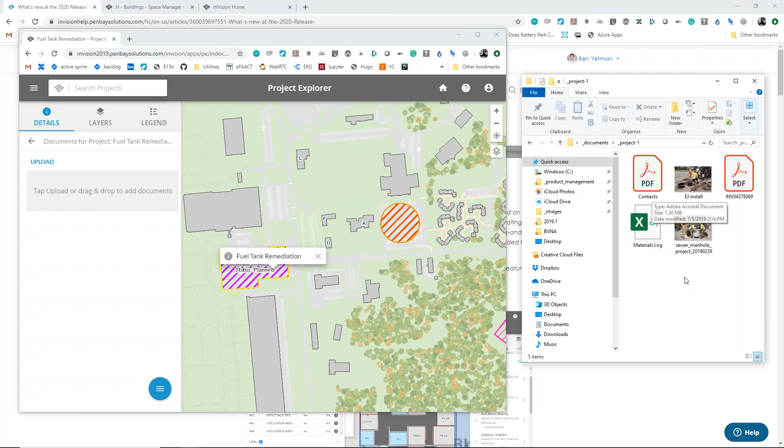One of those is drag and drop. So if we get back from the field and we've just finished a project, or in the middle of a project, we've taken some photos, we've got a material log, we've got a couple PDFs that are part of this project. If we went into InVision in the past and said, okay, I want to just add these documents to our document management capability, you'd have to click through one by one, browse for the file, find the file, upload it, and then you'd see it show up. We've really focused more now on, instead of having to do 27 clicks to get there, what if I could just grab all those documents I want, drag them and drop them, and see those upload right away.

So whether it's a space, a building, a project, an asset, drag and drop for adding content or managing documents in all the apps is one of those productivity enhancements.

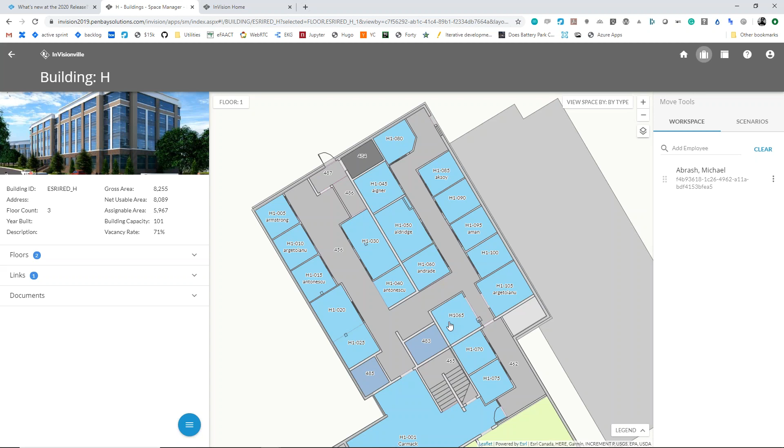Another place where drag and drop comes into play is if we jump into a building. Here in building H, I can see that we have a couple spaces assigned. I can see the label of the person who's actually assigned there, and in our move workspace, I want to assign Michael Abrash to the space here. In the past, you would have had to have gone in, click this space, look for assigned employees, another click here, another click there, find a search, and once you finally find the person, another final click to save. That comes out to about 8 clicks.

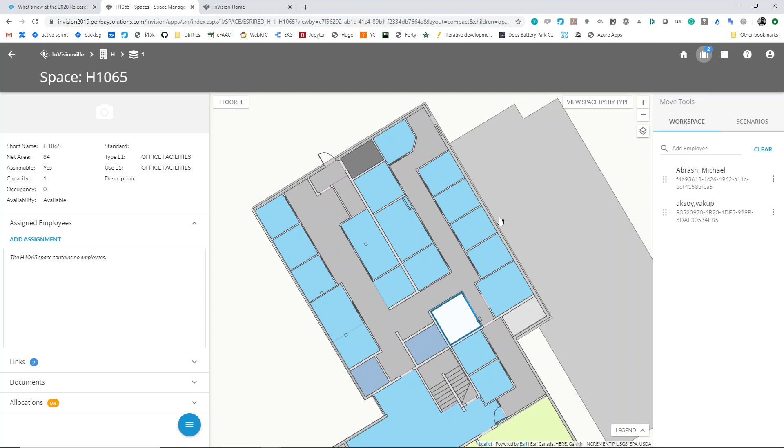Takes way too long. So now you can actually just drag and drop people into the space and go through the same exact workflow. Or if I decide I don't want to drag that person, I want to actually move Aldridge to the space next to him, I can do that. Or if I want to actually move this person out of that space, and I don't want to put them on this floor, I need to find another floor. We'll go up to the second floor. I can jump up to the second floor, find a vacant space, and add the person there. So the ability to do very quick drag and drop for simple assignments is another one of those big productivity enhancements.

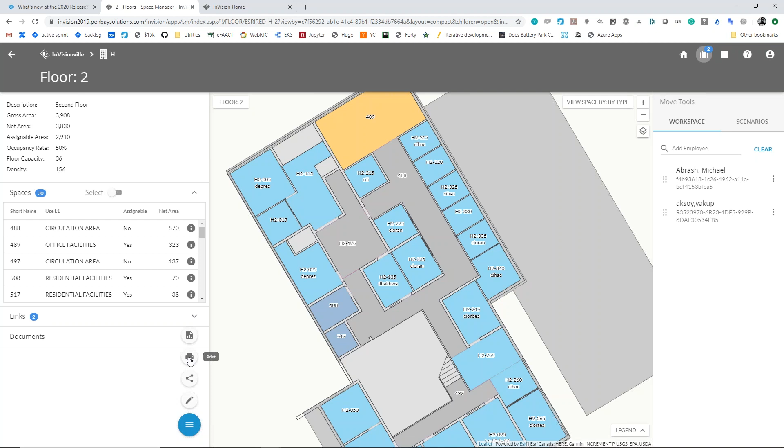One other place I know we've all spent time twiddling our thumbs waiting is in somebody's favorite feature, printing. So let's say we've got our view by switched to organizations assigned, or maybe let's do it back to availability, and we want to actually share this with somebody. So we want to create a PDF print of this floor. We could, if we wanted to, go through good old-fashioned printing, except I disabled it for today, surprise.

But instead of having to go through the print dialog, give it a title, give it a subtitle, choose a layout, click print, and then wait for the print to generate and then download, we've actually been adding more and more to our automated block plans. What automated block plans do is behind the scenes actually generate a high quality layout. They will rotate and scale the floor to that layout. And based on how many you want to create, you can have different themes of your downloadable PDF block plans.

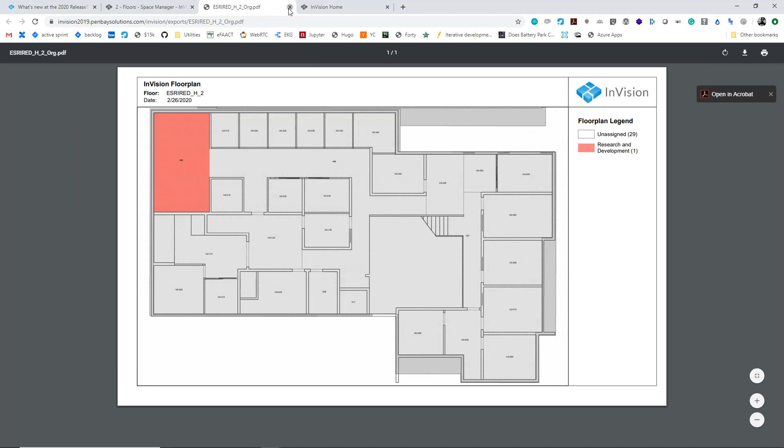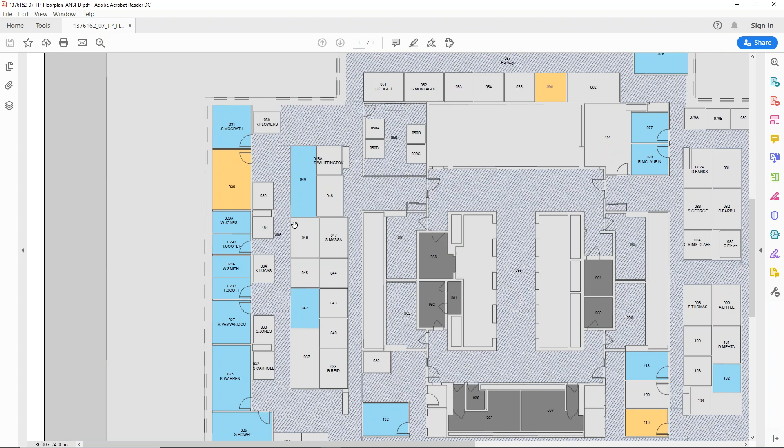So you know the data is up to date, and you can create as many of these as you want. What's really cool is you can customize or configure what is included in the layout. I have an example here with the names of space assignees in addition to the space number. We've seen others where people add square footage, so you can get pretty creative with the number of automated block plans you configure and make available to your end users.

So those are a handful of the productivity enhancements. We've also done a lot on the modernization front to make the apps even smaller and faster to load, especially on the Explorer side. You'll notice some of those as you start using the apps.

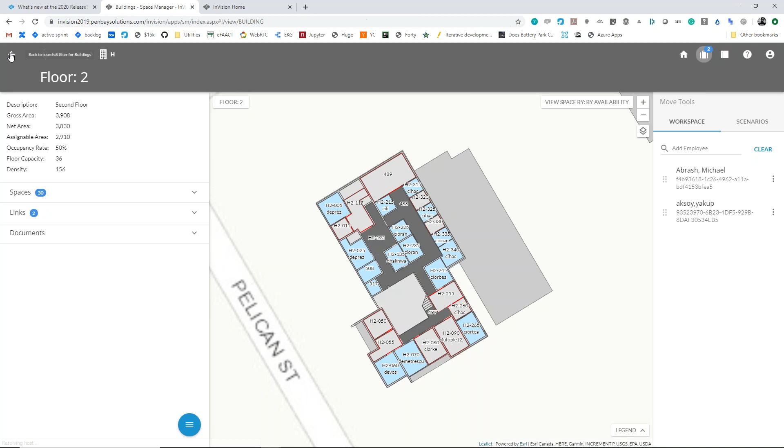One of the big ticket items we'll move into next is Move Scenarios, a new addition to the Move Tools capability. Over here we have our Move Tools work palette and our Move Workspace, which we've had for the past release or so. This is a place where, if you're working on day-to-day work, you're trying to find a spot to assign a handful of employees, and you just need a parking lot to hold them while you search for space.

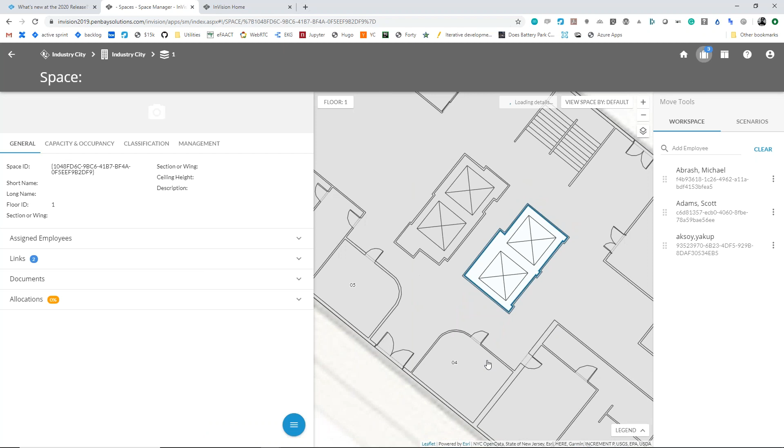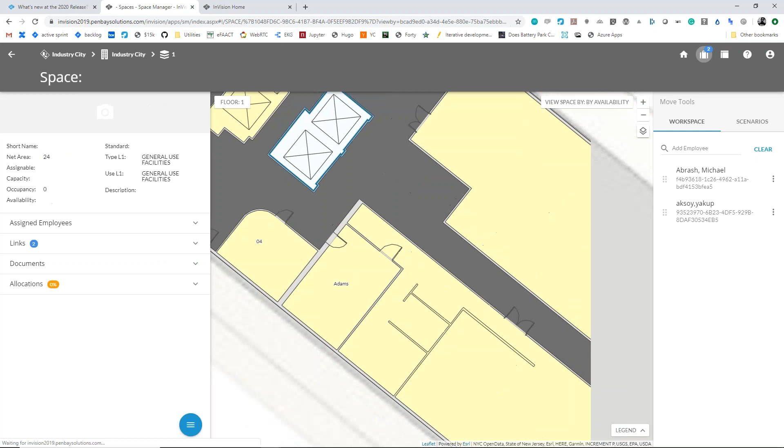This uses the same drag and drop interaction. I can add somebody here, then search for an appropriate space or floor to perform an assignment. When I get there, I can still use all my view-bys to figure out where I might have availability, and do a simple drag and drop to perform that assignment. That's a way to work through a backlog of people you want to assign right now, things that will actually be part of your production.

But we also know there are always what-if scenarios that organizations need to better understand and work through. So the new capability around Move Scenarios can be used to ask really complicated what-if questions for a bunch of different types of potential moves.

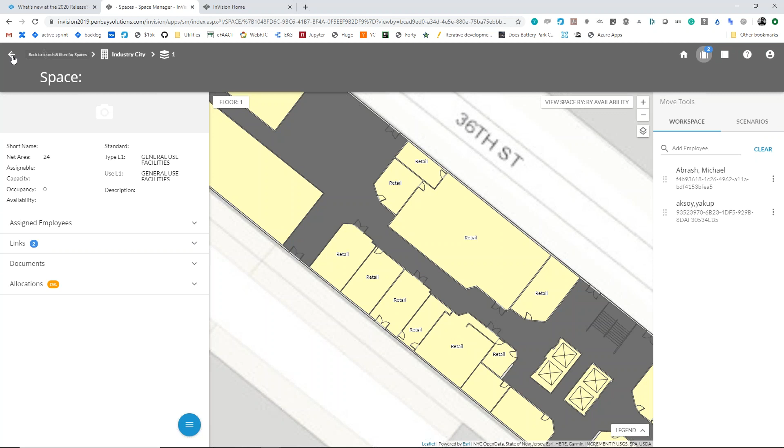If we open up Move Scenarios, I can see we have 3 different types of scenarios I've created. One, very common, is we just want to look at a test fit—could be a single floor or an entire building, sort of a restack—to see if moving people working on the same project closer together on the same floor helps us shuffle people around to optimize productivity and minimize disruption for moves.

We could have another scenario where a new building is coming online, and for the first time we have people moving in. So we have to figure out where all those people will go, even if the building isn't done yet. We might also have a common occurrence where part of a floor or an entire floor needs to be renovated, so we've got to figure out where to move all the people for the next 6 months, and then remember where we moved them so we can move them back once we're done.

So all of these are very common needs to ask and evaluate different types of scenarios. If I go into a scenario here, we've got a very simple test fit for building W. We can see this is currently in draft status, meaning we're still evaluating where to move people and still in the process of doing our work.

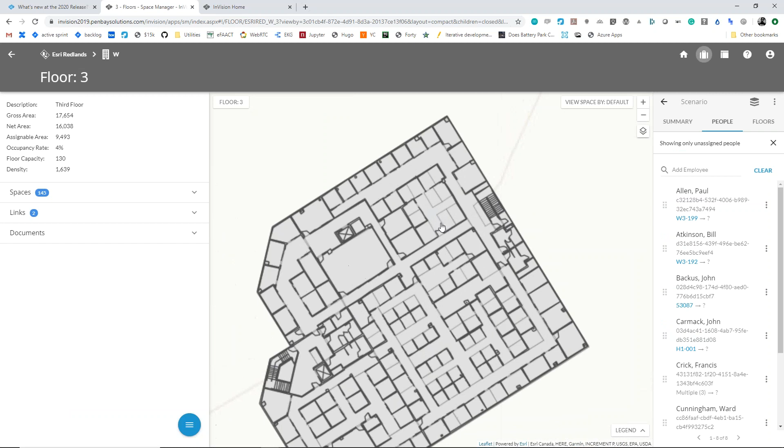We'll turn on a view by so we can understand the types of space we're moving people into. You can see some of my previous work here. There were people assigned to this space, and if you see a strike through, that means I've unassigned them from that space.

You'll see Crowther here has been assigned temporarily as part of this scenario. It might be that I want to remove Allman from that space. I'm going to put Allen back in that space, and I can see the map update to let me know where I'm at and what I'm doing.

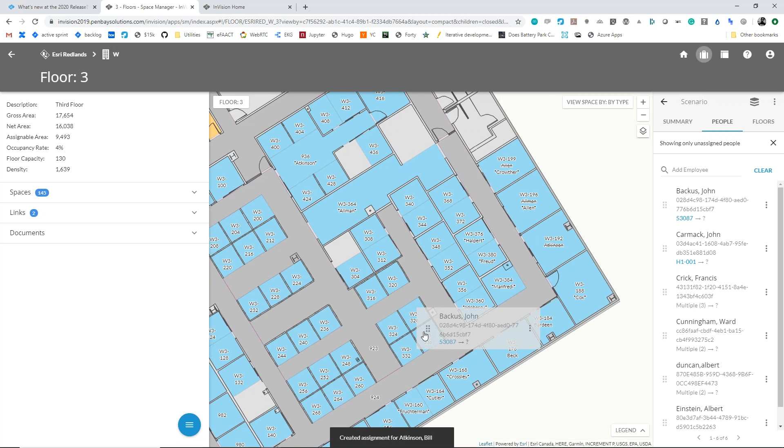As I go through and do these assignments, these are not actual production assignments, these are just a scenario. So nothing I'm doing here is going to actually affect any production data. I am free to do whatever I want, make as many mistakes as I want, back up and try again, and do everything we need to get it just right.

You'll notice on the right, as I'm moving people in, we're going pretty quickly here. I'm able to just run through, do these drag and drop assignments, and get through my list. One other thing you'll notice is it'll ask me, hey, do you want to remove people from multiple spaces or just move them from one space?

So when we get through our initial assignments, see we're done. One of the other things we can start to do then is say, okay, we've got everybody assigned as part of this scenario. I can see some of these people had multiple space assignments before, and now we have one proposed new assignment.

So we can go in and get very granular about which of the spaces we want to remove them from, and whether there are certain spaces we might actually want to preserve for them. If we have an employee that works on multiple campuses, or people that perform different roles in different parts of campus or different buildings, it might be valid for them to have 2 different office assignments. Maybe we want to remove them from these 2, but we'll leave space 698 as well.

So Francis now has this existing space and this new space here. As you go through, you can get very granular about how you handle a multi-assignment policy, because we know in the real world that's almost always the norm, and there are always going to be special circumstances where you need to accommodate those kinds of folks.

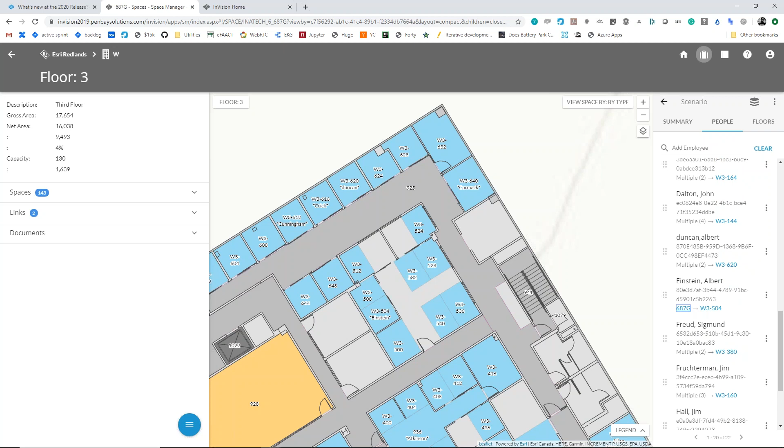You'll also see that anytime you have a question of, wait, where did we find Albert Einstein again, where did we move him from, you can really easily click the origin space to see where we're moving Albert from. You can always click the destination to figure out where that person's going. So it's really easy to reference the from and the to as part of a move scenario.

It may be that we wanted to add additional floors. If we were doing a building restack, we could have added multiple floors here. I have one because it's more of a floor level shuffle. But we've gotten to a point now where we've gotten through all of our people assigned in this test fit, so all 22 have draft assignments.

And we kind of want to evaluate: how well did we do here? Does this meet our objectives? Did we make any errors? To do that, we can go to this next step, which is finalize. This will actually run all of the analysis on that scenario, and give us any errors or warnings that pop up. If you notice, we didn't have a single error or warning there, which means everything we did was perfect, which I find hard to believe, but hey, I guess we got lucky.

So if we were to go in and remove this person out, we'd make a space that's over-allocated, or even if we have people that don't have an assignment now - so I've got one person - as I start going through and finalize, I'll get warnings.

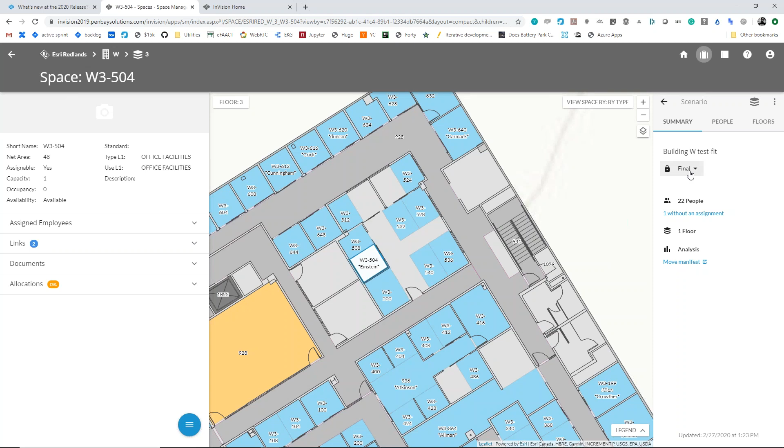So let's say we wanted to ignore this and finalize. We now go into final status, and it might be now, it might be previous, or really any time in between that we want to remember all the changes that we made. Sure, I can see them on the map, but it's kind of hard to look at all those names and numbers, so you also have a move manifest.

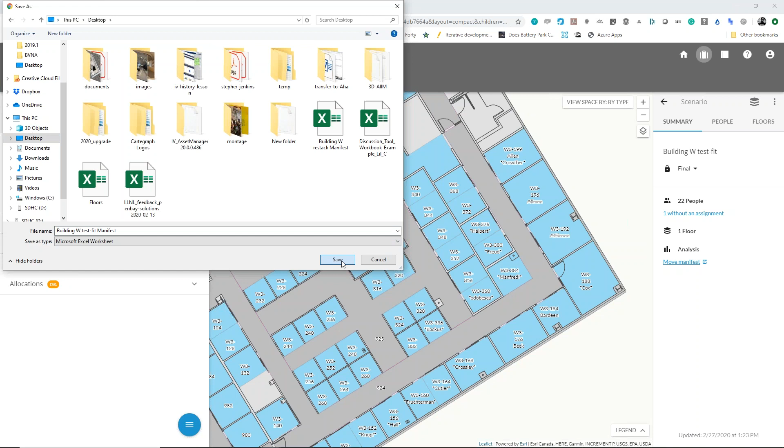And the move manifest is what you can share with people at any point to help them understand all the changes in your scenario. So if we open this up, this is very simple—everybody can use it because it's just Excel. And it shows you all the people that you've added to a scenario, the unassignments that you made as part of your scenario, and where you're proposing to move them.

So what space, building, floor. You can see there are quite a few here where we've unassigned them from multiple spaces and consolidated them down into another space. In some cases you've removed them from like three spaces and consolidated to one.

So this move manifest can be used to share with other planners. It can be used once you're actually ready to execute—actually sharing this with the operations folks that are going to help move boxes and transfer IT equipment. And it can also be used as a historical record.

So if we did go through and decide we were going to apply this move, we could apply this. And again, we'll say, yep, we'll ignore—sorry, Paul Allen, you don't get a space. These assignments are now in production.

And if we wanted to, we could go back and look at that move manifest anytime in the future to remember what we actually did for that move. So if we go back and look at applied, we can see, yep, there's our test fit, and we can remember exactly what happened, who moved where, and take a little trip down memory lane.

So move scenarios allow you to very quickly create a new scenario. You can move it through different phases. If we wanted to add a new one here, there's very little overhead in creating one, because these are meant to be pretty much zero impact and the ability to ask all kinds of what-if questions.

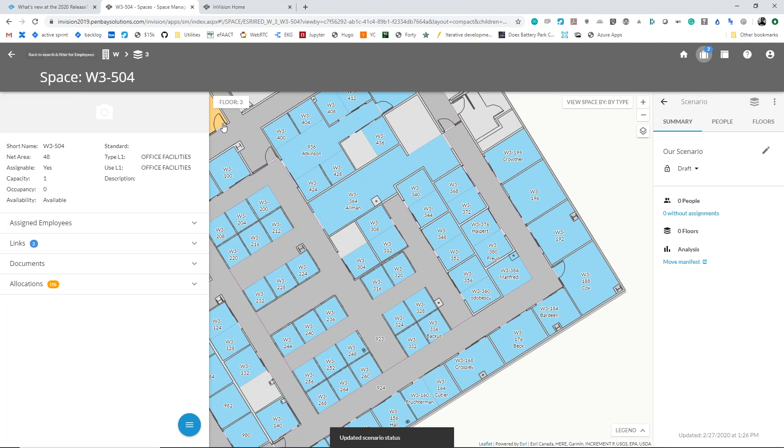So we'll do our scenario. It may be that after we get into our scenario, we decide this scenario didn't quite work and we want to abandon it because we don't really want to pursue it anymore. That won't show up in your draft list, but if we ever do want to go back and dust that off, we could look at which of those we put on the back burner, and easily take it back to draft status and start adding people and floors like we would. So if we wanted to dust this one off, we could easily start adding a floor, add a bunch of people, and jump right back into where we were.

So you'll see a lot of drag and drop interaction here for people, for floors, for actually doing your test fit assignments, unassignments, and moves. And we have made some deliberate design choices here based on how and where you're doing your work. You're looking at me doing my work on a laptop right now, with a mouse and a comfy office, and buttons I can click, but we know that's not where everybody does their work. Oftentimes you're in the field, on a tablet, looking at spaces as you're trying to walk through and plan things out.

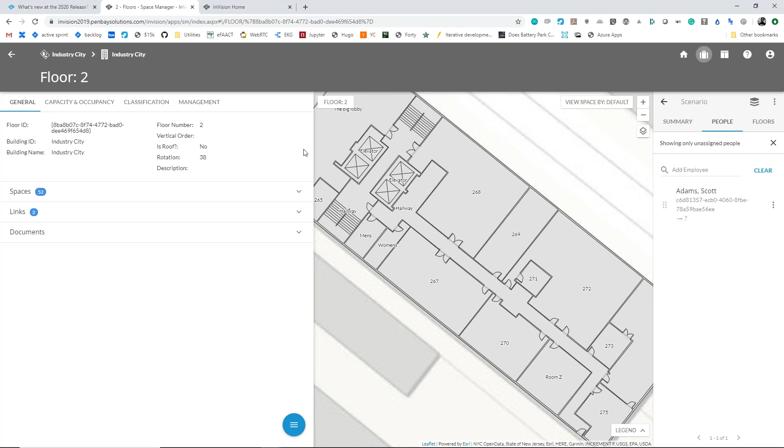One other thing you'll notice is this has all been designed for use on tablets as well. We can use drag and drop as long as we can click, drag, and unclick. But if I tap, you'll see at the bottom, for touch devices, we have an assigned space dialog. Same thing, I could use this on a laptop or on my iPad. I tap the space I want to perform the assignment on, and the assignment works the exact same way. So there are methods for using this in different environments, mobile, touch interfaces, as well as back at the office in your comfy chair.

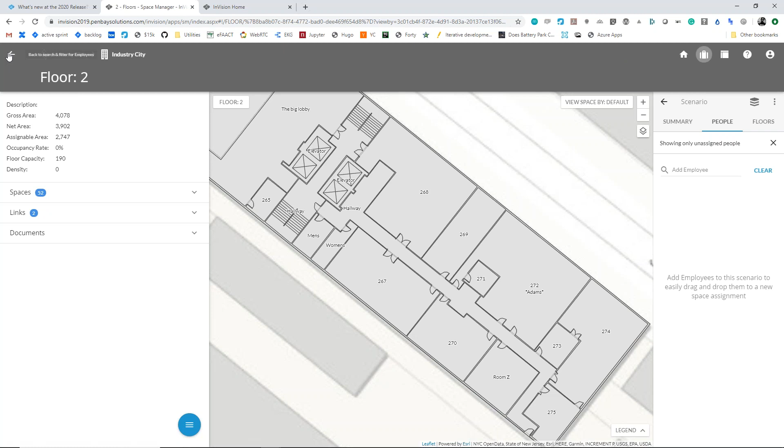So that's a very quick look at move scenarios. We're excited about this one, and foreshadowing a bit to our summer release, we have a bunch of additional enhancements we're working on to go even further into making the job of applying a scenario even easier.

Part of that is actually us looking at creating move requests behind the scenes, back to the system that's going to actually do the work. So integrating with Cartegraph, who does that exact same kind of thing, to create a move project once we get through to a point where we're actually ready to apply a move scenario.

So some exciting stuff there, and some more usability and productivity enhancements based on feedback. As you guys start using this, we are all ears. Please let us know what you think and anything we can do to improve the usability of this. We're pretty excited about how usable the drag and drop interface makes the often very tedious process of doing test fits.

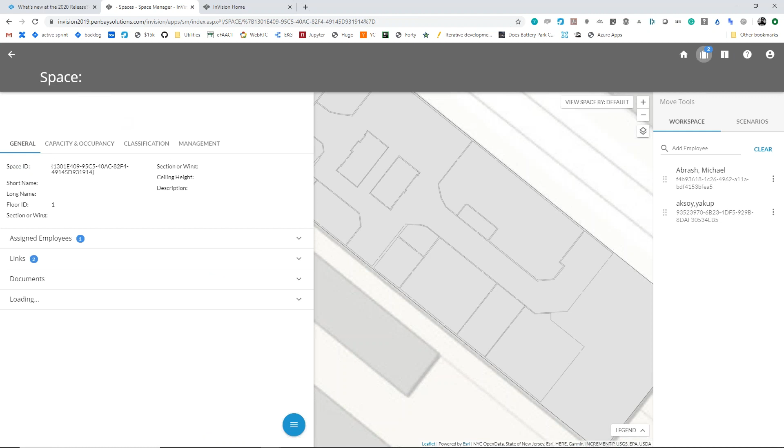So we'll switch gears here a little bit. One of the other things that is very apparent to a lot of people, but people that maybe don't work in data as often, not so much - if you're looking at space, if you're looking at buildings, if you're looking at any of the things that you manage, we know that this space right here is not just a row in a database. This is not just a polygon represented on a floor plan. We know that there's a lot that goes on in any space. There's a lot of context related to any asset.

One of the ways that we try to help people understand that, of course, is the visual nature of InVision, the fact that we display so much visually. But we also have started adding the ability to add documents that help understand the context, image galleries, and those image galleries really start to let you get a picture of the thing you're looking at. At this release, we've added support for inline spherical image control. So this brings really more of a 360-degree context to any of the business records that you're managing in InVision.

So if we wanted to help people understand what this space looked like, I've uploaded a couple of spherical images, and when you do that, we can open up our gallery, and instead of just seeing a single photo, we can actually start to communicate information like, what did that space look like when it was under construction? Where do we actually have MEP before the sheetrock went up? As a historical view into that space, what do we have behind the drop ceiling?

Or switching gears, what if we're an emergency planner and we have a spherical image for that space that helps us understand where emergency exits are, where we have our CCTV cameras, our physical security, the ability to understand blind spots and really immerse yourself in that space - that's powerful, whether you're someone working on construction, safety and security, or someone looking at classroom programming, trying to figure out all the different layouts a classroom has with projectors and other equipment.

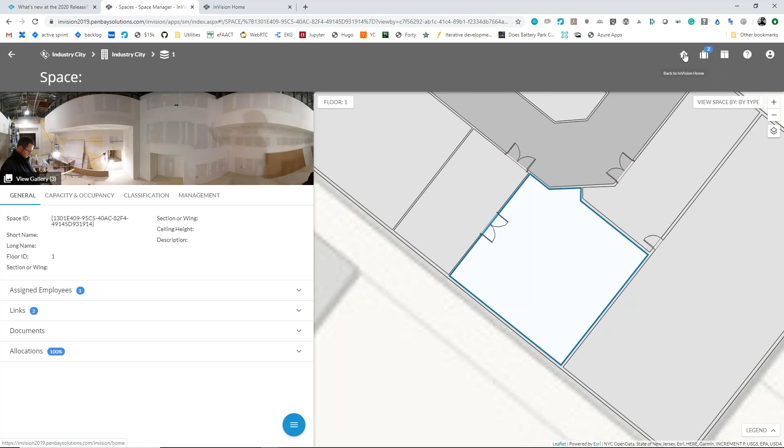Next, we'll move back to Home, where we haven't really spent any time today. On InVision Home, one thing you'll notice is we've always had KPI cards. But at this release, you'll see some of the KPI cards look a little bit different, and that's because we've enabled a feature for KPI cards that lets you define targets.

What this lets you do is still define your KPI cards the exact same way, but when you go into settings, you'll notice a new area that lets you define a target. The target will let you set a threshold. So depending on how you've configured your KPI card, the value should be above, the value should be below, or you can actually define a range, like saying this should be between 0 and 2.

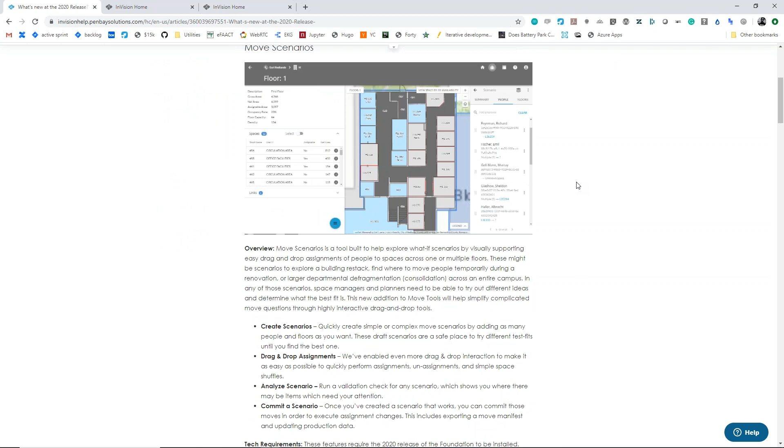Great question. This is one of the things I'm most excited about, something we're working on for the rest of the year. Today we have support for uploading a spherical image, so you can pan, tilt, zoom, and view it. There are other capabilities in the open source library we're using that would let us do a lot more with that interaction - you could tag things, link spherical images together for mini tours, create hotspots and anchor tags and other ways to interact with the image.

One of the other things we're starting to explore, very early days, is that there's a lot of visual content in a spherical image that's valuable to other people - someone managing assets, or managing safety and security. So we're looking at enabling organizations to use these 360 photos to pull out and identify room contents compared to what you might already know for an equipment or fire extinguisher inventory, showing where there may be things missing from inventory. This involves machine learning to pull out standard objects from those 360 photos to validate your existing inventory and populate missing parts.